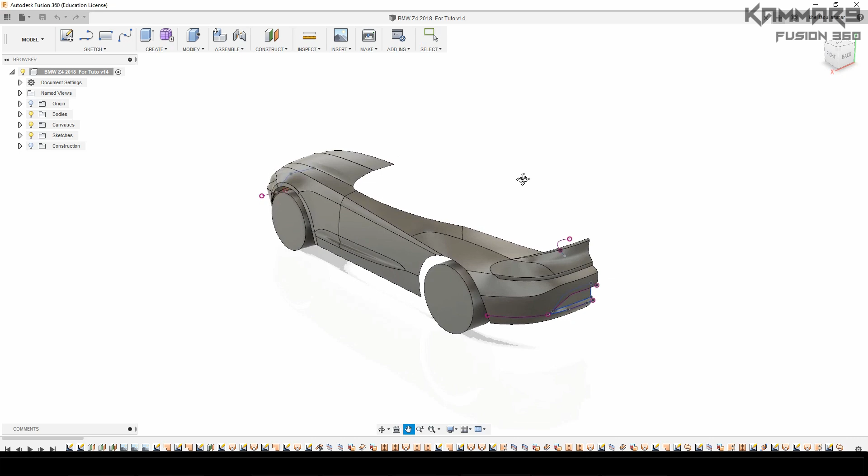Here we're working on the Z4, in the rear, in the back of this car. Thanks to all the people following this series on the BMW Z4. I'll try to make it easy to help you learn the surface mode, or patch mode, in Fusion 360.

As you can see here, I start with a nice curve, just make 2 points and work with the controllers to make it in the same place.

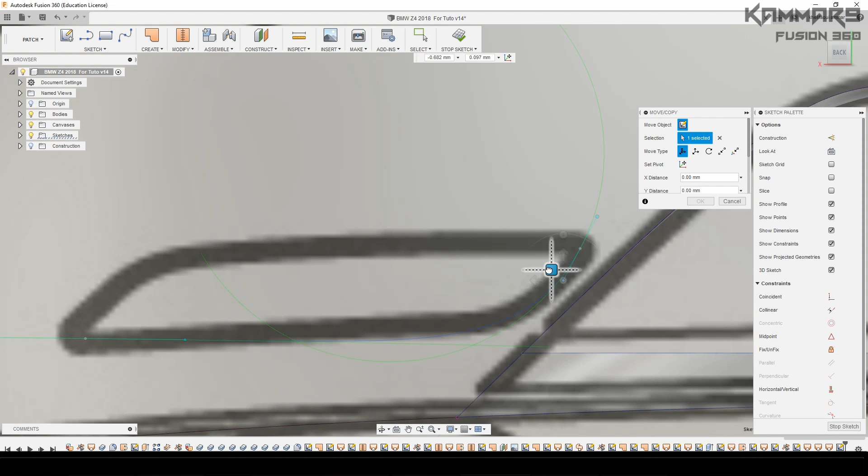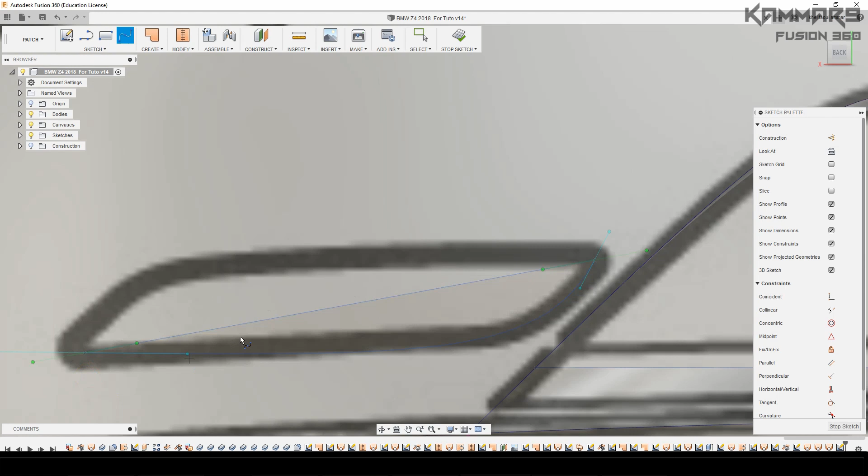As you can see here, Fusion lets you move all the controllers just with the mouse, not like in the previous version. Just use the mouse, don't use the M key. Just click and drag, and you have a nice result, as you can see here.

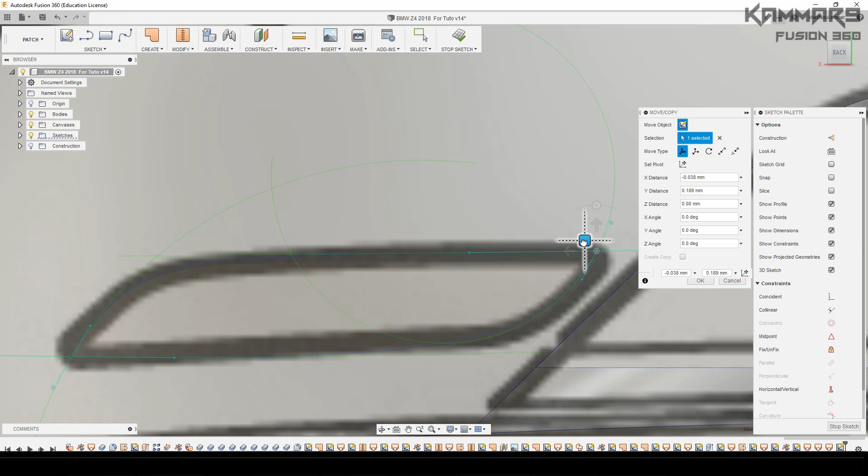You have to fit it to the blueprint. If you have a problem with the blueprint, refer to the first episode. I explained how to add the blueprint in Fusion 360.

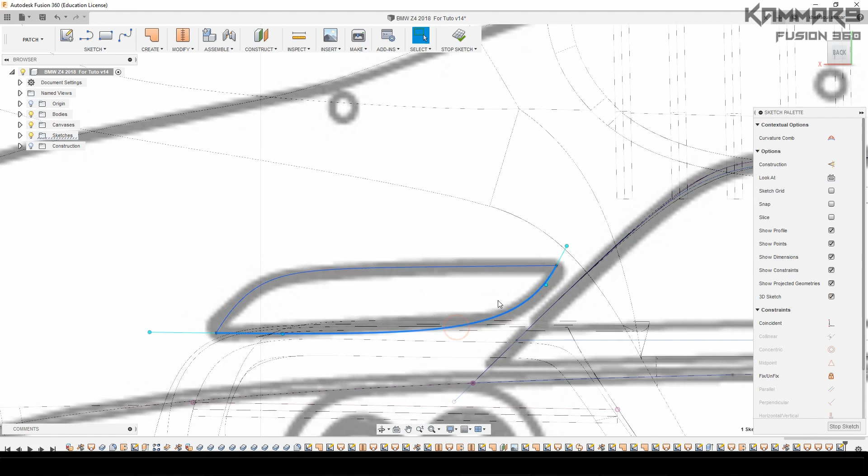As you can see here, you can use the shortcut key to change the view like this on the screen, to see what's going on in the interior of the car, and see the edges and hide edges.

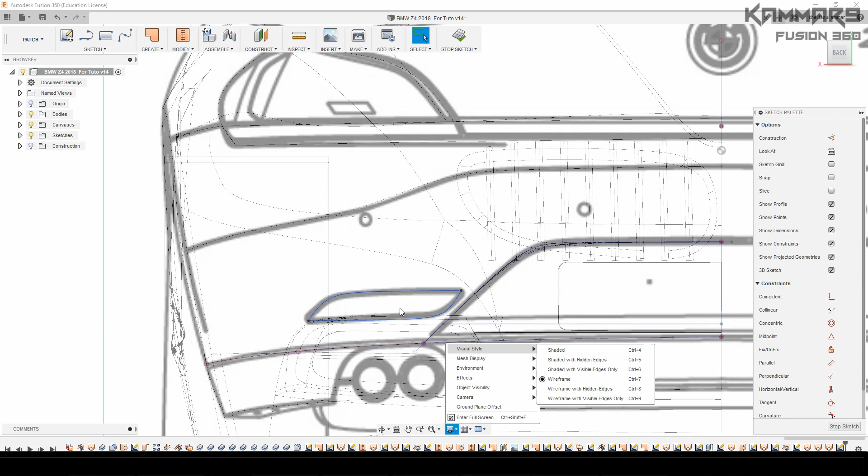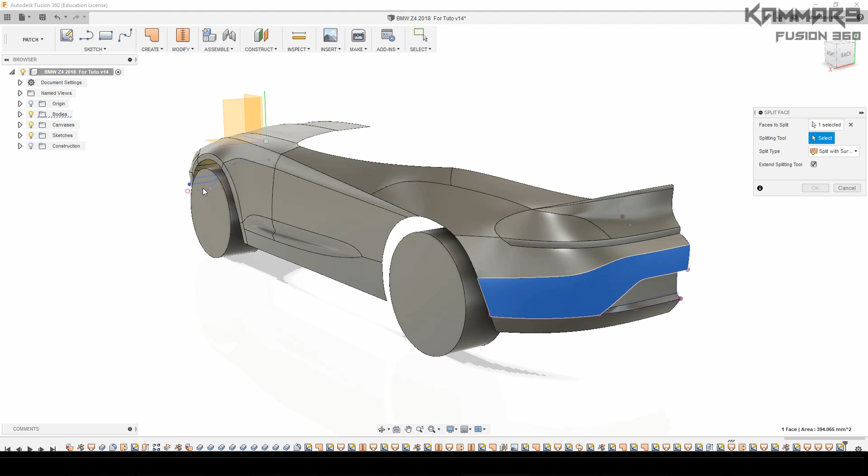As you can see here, you can use a shortcut to see this. And now, if all is alright, you can trim the surface using only the sketch we did.

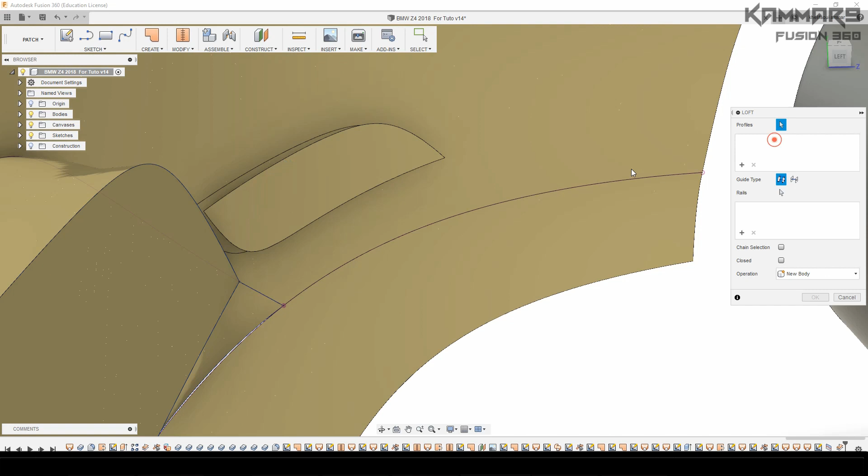Put here 0.5 and reverse the direction. You can rotate your car here and see what's going on in the interior. Just use the loft. The loft feature is nice here because it lets you make a bridge between two surfaces.

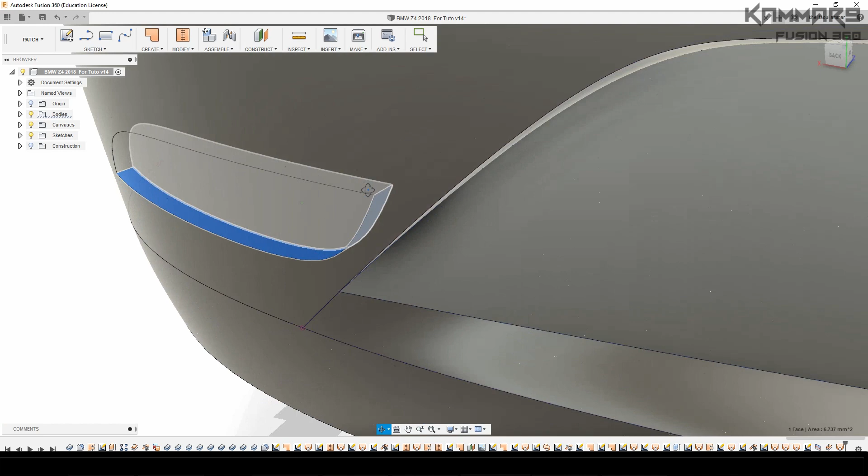As you can see here, with this you can make a nice result to use it in KeyShot, okay, when you add material.

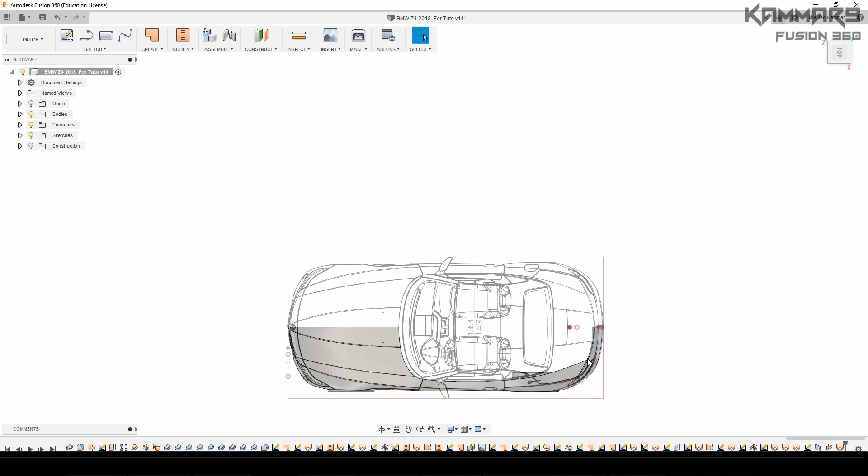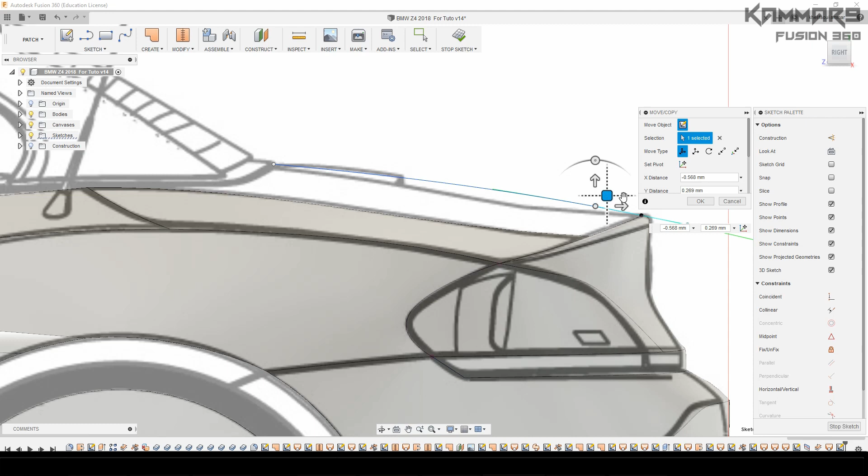Let's go on and make the top back of the car, or the cover. Let's use the right plane and start with the spline, just using the first point here, and see your blueprint. As you can see here, I will fit it to my blueprint. The goal here is to make the general surface, and we'll cut it after and add details.

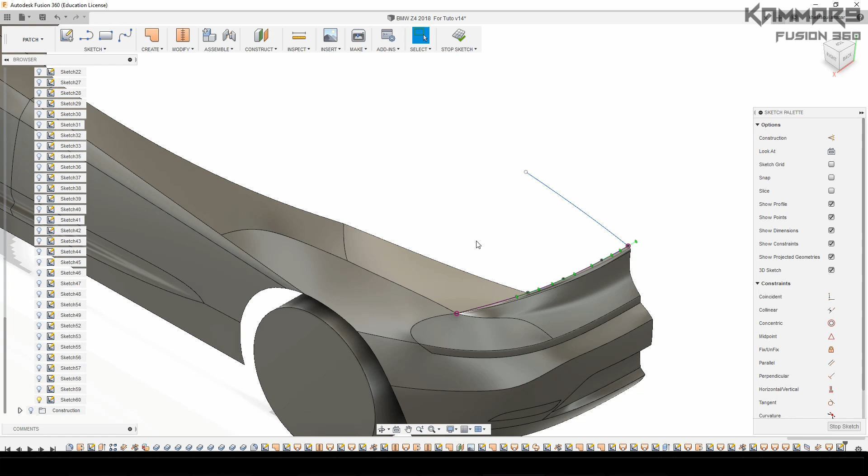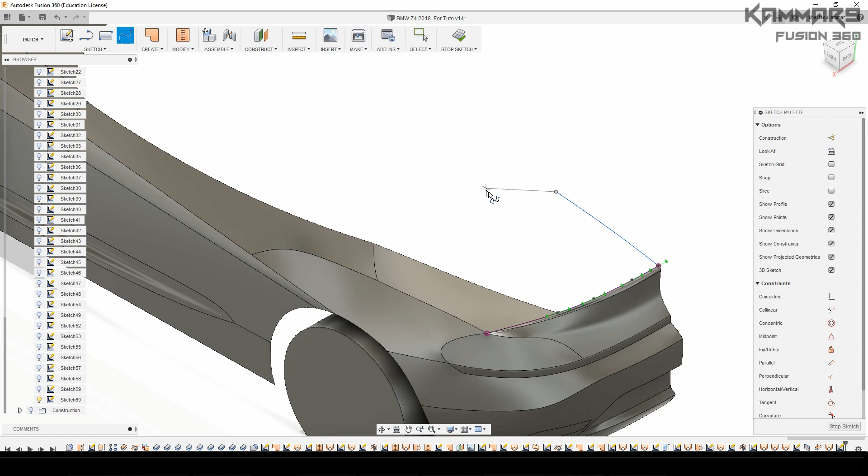Here you just have to hide all sketches you used in the previous surfaces, and add another. Make sure that to do this you've activated the 3D sketch in the sketch palette. That's the second spline, and for me I have to add another spline here. Just make sure when you touch your 3D sketch with the surfaces or the edge of the surface, you have to activate the 3D sketch palette.

As you can see here, I will click here, and I have to click on the edge of the surface to make it coincident. But the deal here is to make it in 3D. Just use the M key to move your controller or your point like this one.

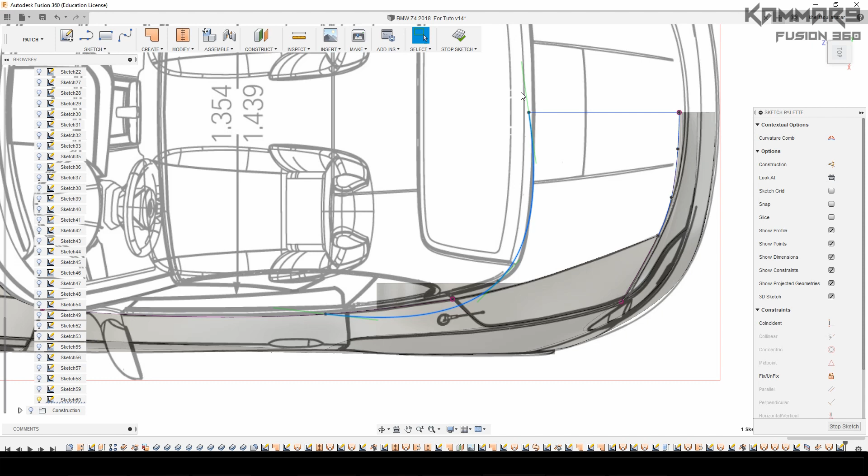As you can see here, I'm using the top view and the right view to make it fit the blueprint, because any error here - if you make an error here, it's complicated to make the other surfaces, because you have to fit all your splines to the blueprint.

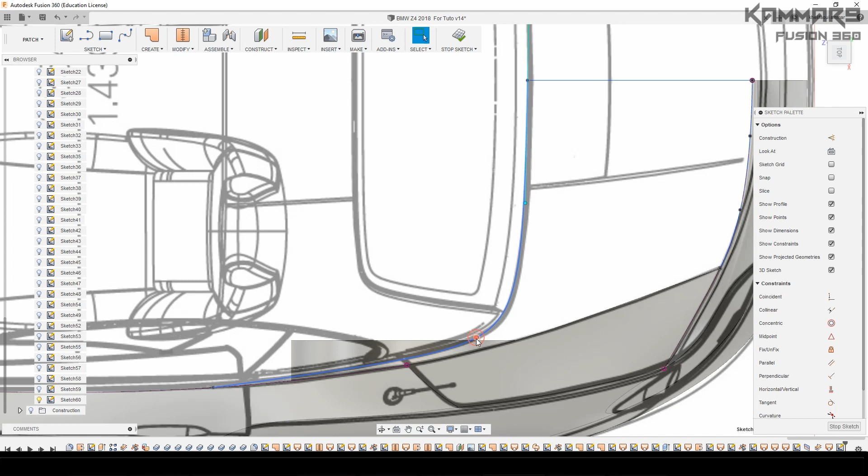At some point I actually accelerated the video, because you only need to see the result. I think you know how to manipulate the spline now from the first episode. We are here in the 18th episode. I think you can do many things in patch mode in Fusion 360.

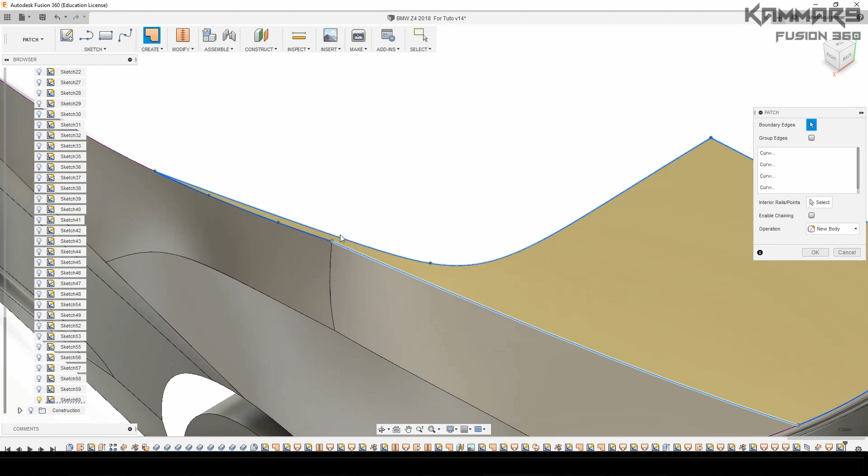Here you just have to choose the patch feature and select all the edges, and you have a nice result here.

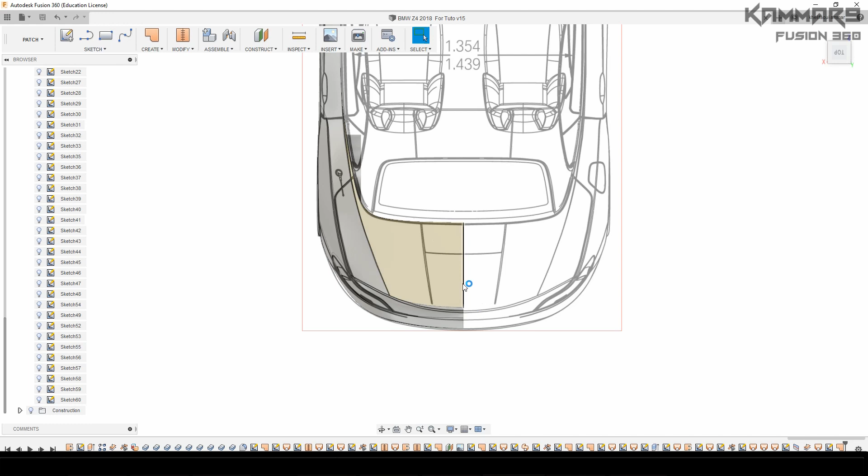Let's go ahead and now make a detail of the top back, or the cover, of this car. Let's choose the top plane - sorry for the motorcycle here - top plane, and choose the spline here, and let's make a detail here.

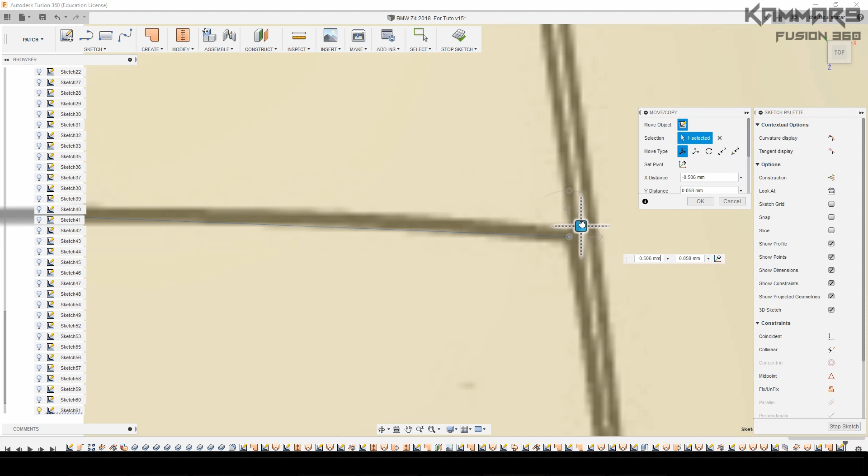All you have to do is make a spline here and move it like this, and choose controllers and move them to fit your blueprint. Choose another spline. If you want, just make it like this, and we will trim it using the trim tool.

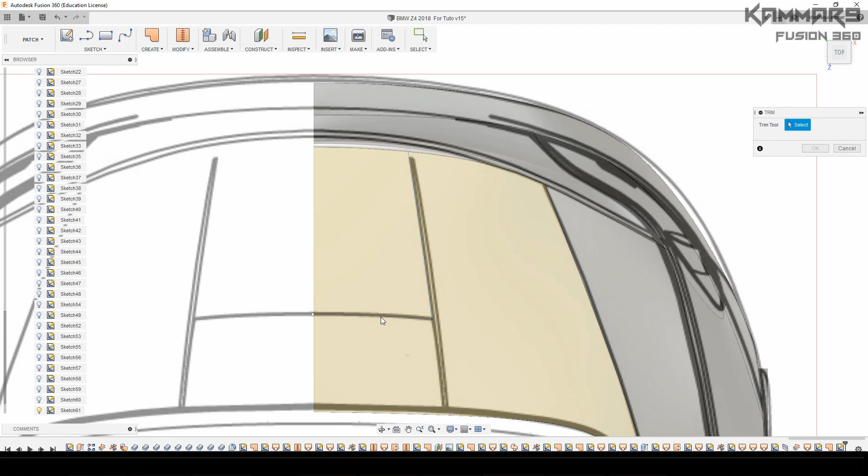Go to the trim tool, choose your sketch as the tool, and remove this surface.

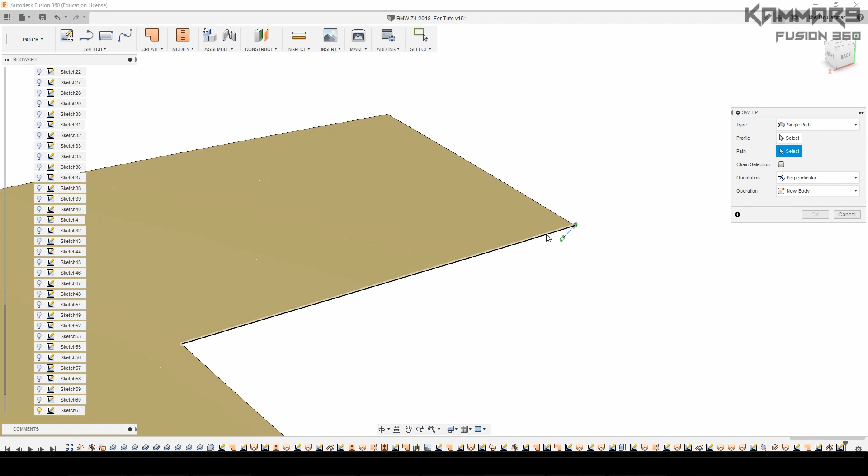Now let's create surfaces on this area. Let's start with the right plane and make it like that, and now choose the sweep feature, the path, and check the chain selection. Select this like a profile, and you have this kind of result.

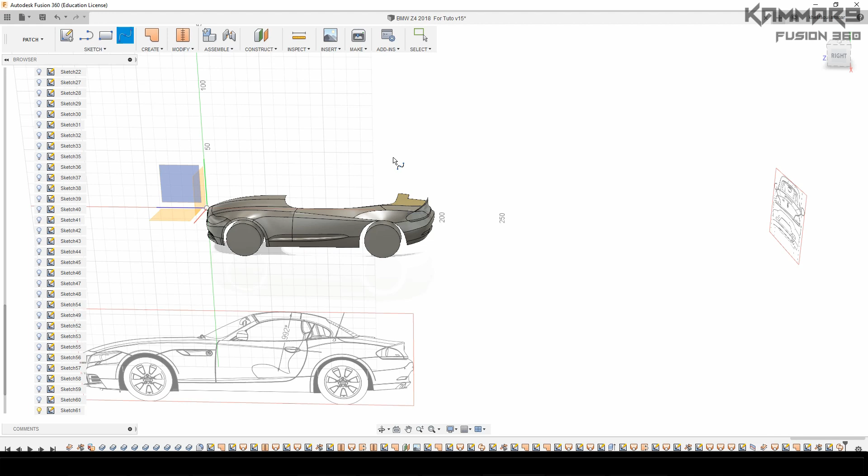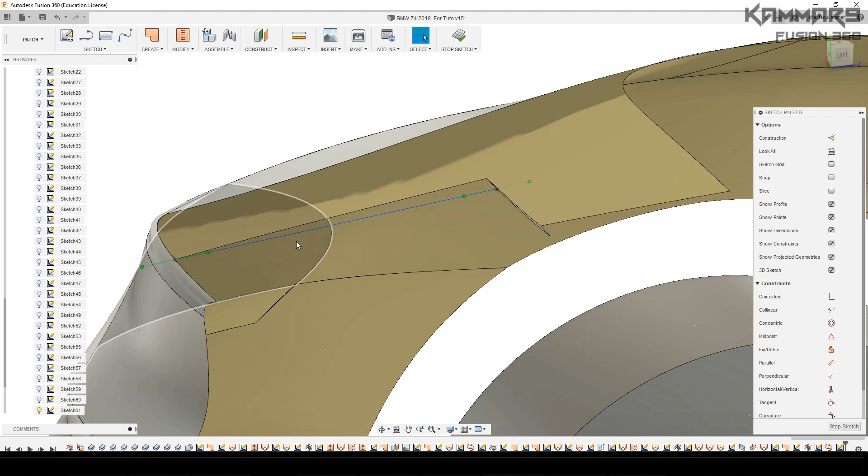Now choose the right plane - sorry - choose the right plane here, and start from this point to this intersection, and you only have to use the loft feature to make surface here.

Choose this as the rail, and the last thing to do is choose the right plane and make a spline or edge from this point here to this point. Okay, you have the nearest result here.

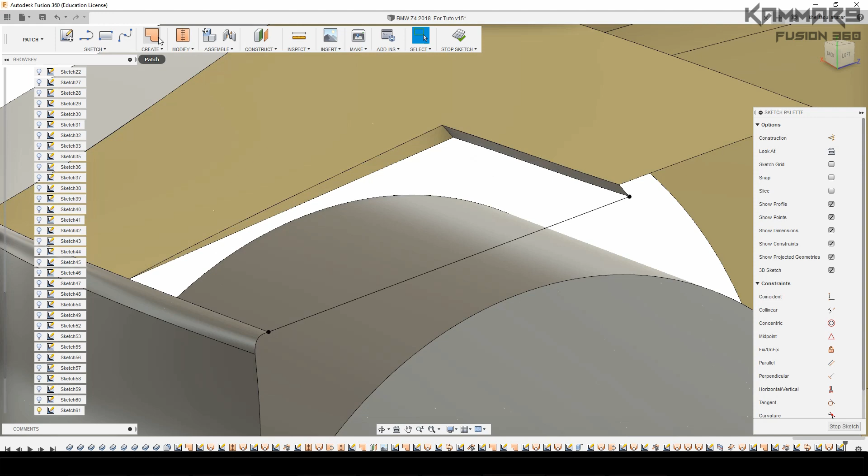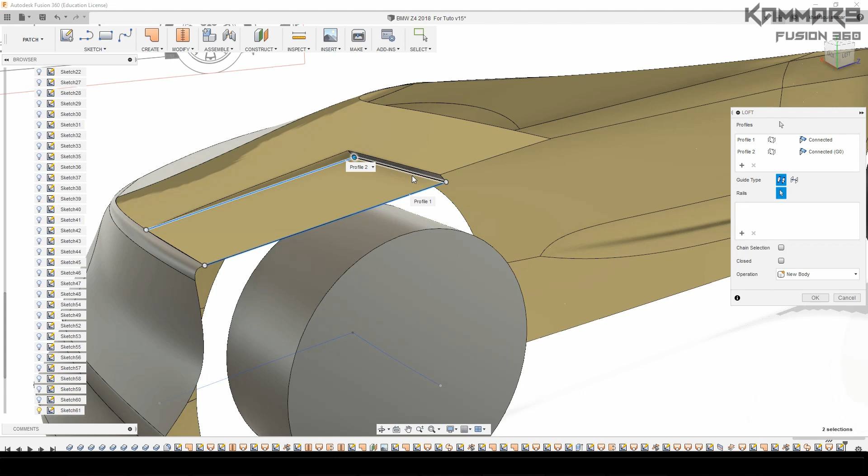I will use this as the rail. Let's use the loft feature, but make sure to remove the first profile - it's not good. I will repeat this to understand what's going on here. This is like the rail. Click OK, and you've done it.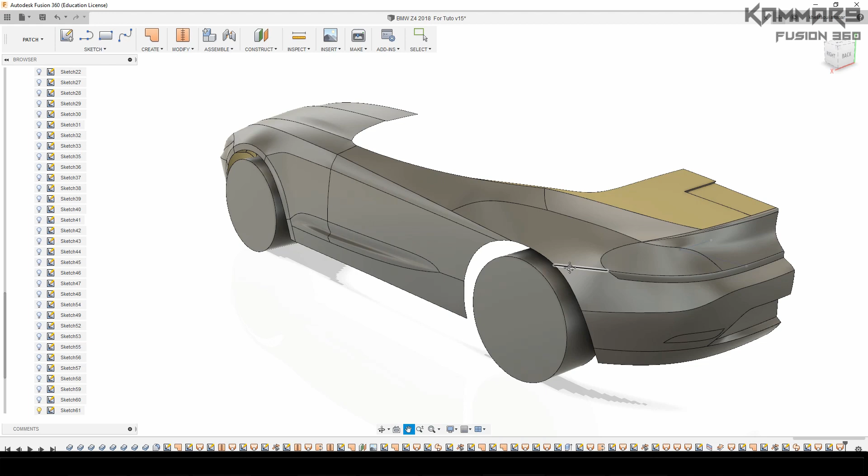Let's move on and make another surface. Let's work on the round of the wheel. Just make 3 points on this plane and adjust it with this controller.

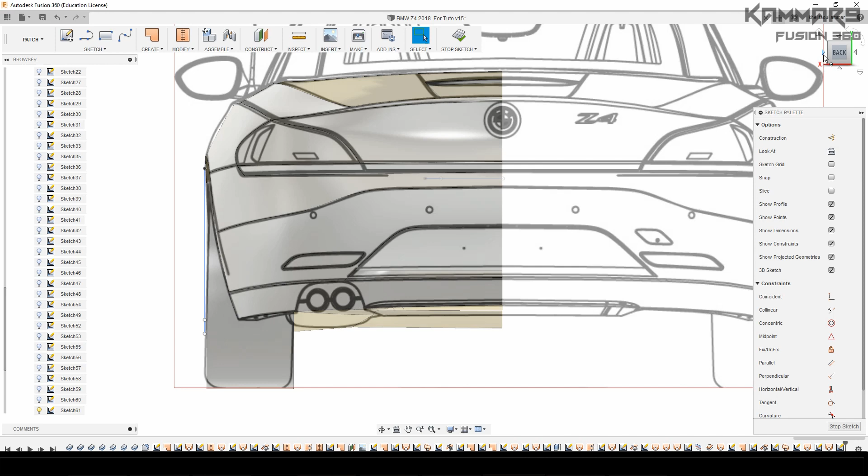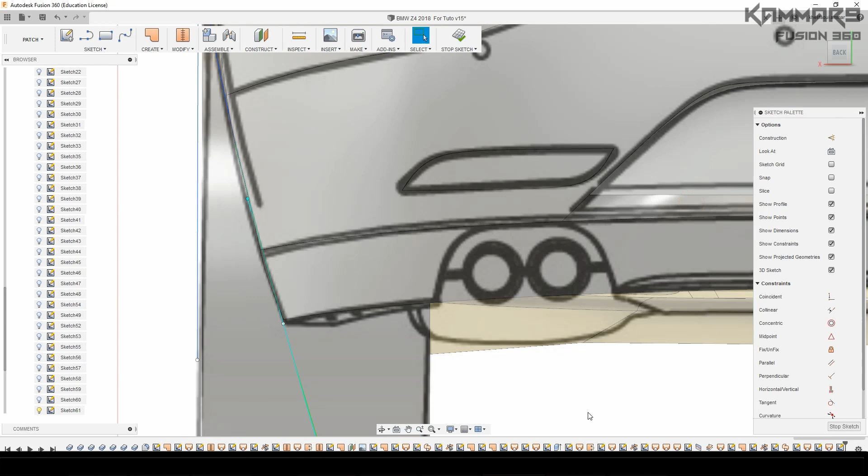Let's move the spline like this one. As you can see here, when you return your view, you have to make this point and this, as you can see here, in this edges. Okay, you have to fit it.

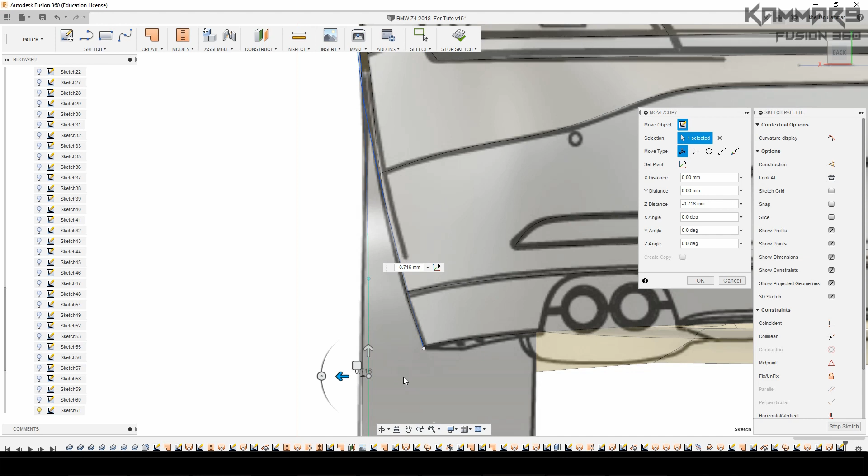As you can see here, the same thing. See from the top and move it like this one. The same thing here, just move it like this one a little bit. Okay, to make a curve spline.

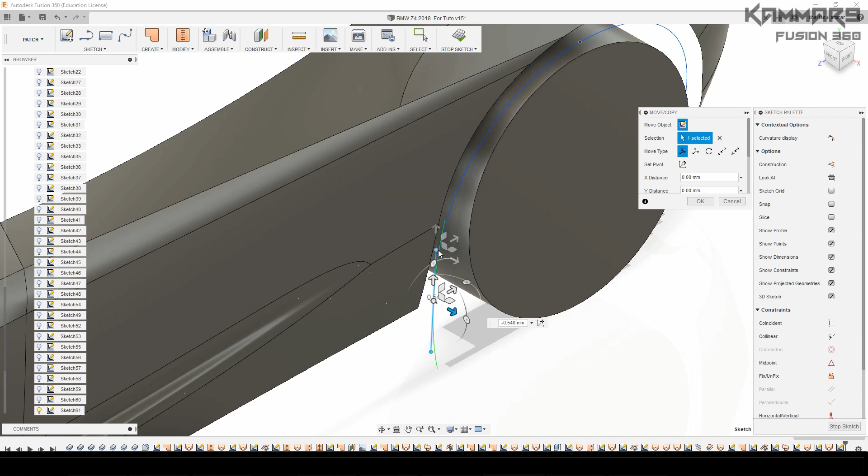Let's see this point. I think it's good here. Okay, I think it's alright. The only thing to do here is to add. I have to... not this.

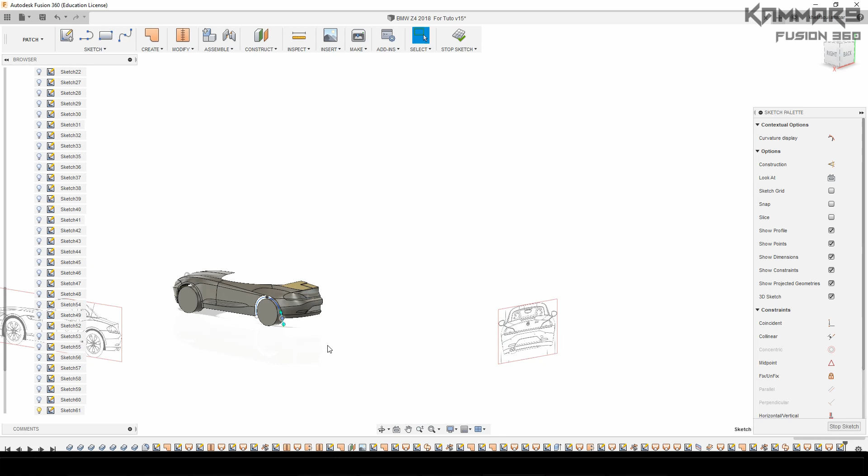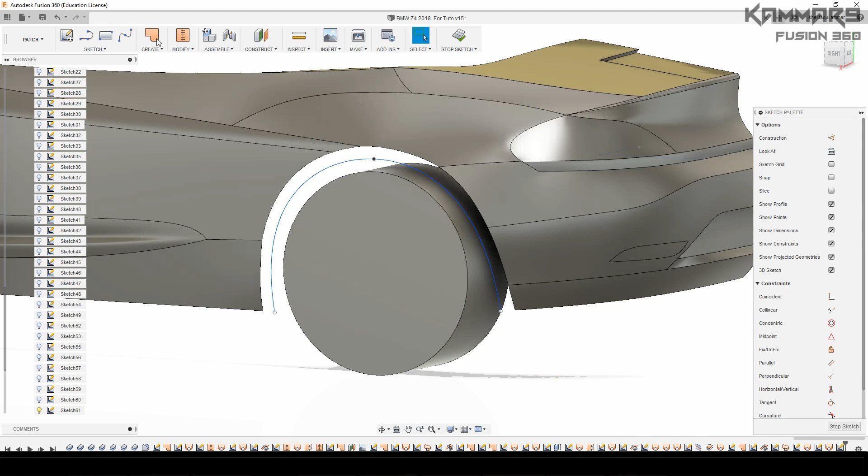Let's see this point. I think it's alright here. You have only just to add another spline. I have to add another spline in the surfaces, in the edge of the surfaces, to make only one, and make a loft to make a bridge between these splines. Okay, I will start from this point

and go ahead. For me, I prefer to select the middle of each surface, because when you select the point of the segment, I try to do that, but I don't get a nice result. So I make points on the edges or the curve edges.

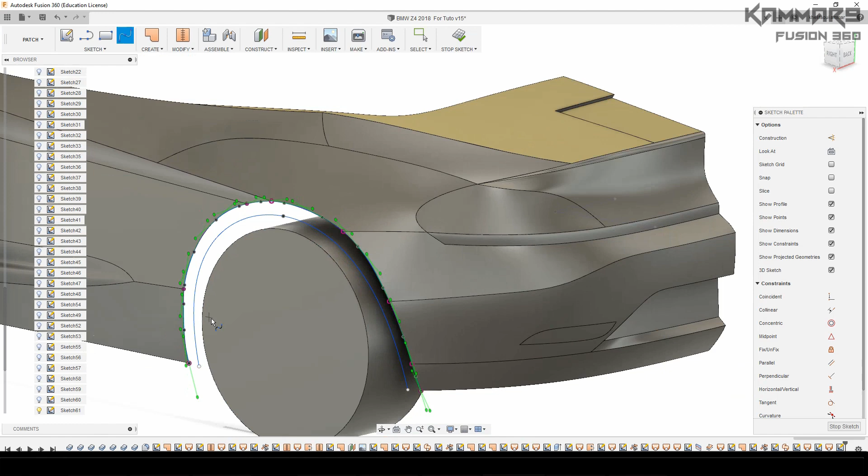As you can see here, you have a smooth curve here, and what you have to do is choose loft like feature and select these like a profile, and you have a nice result here.

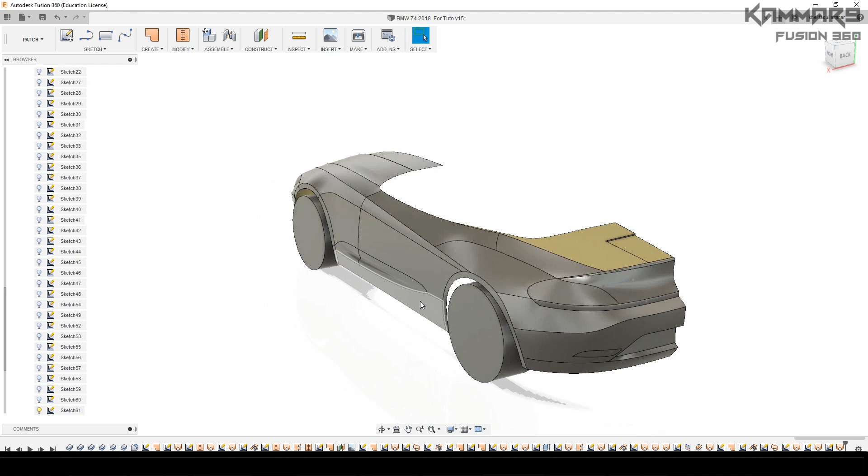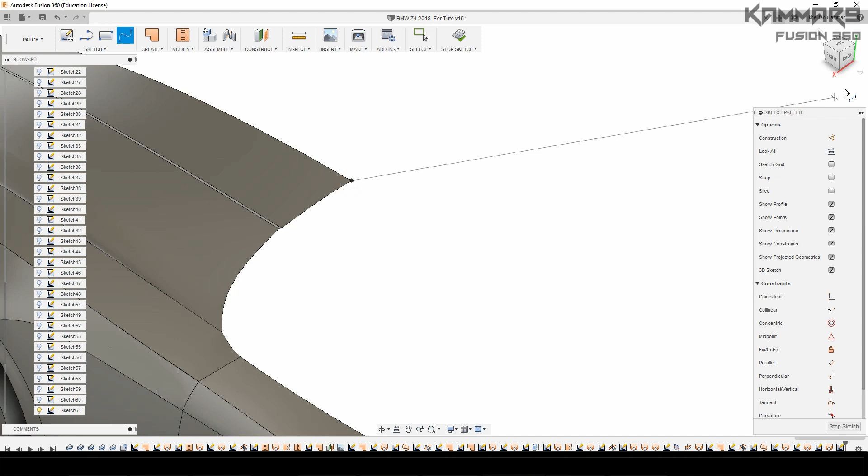Here I will make some detail of this zone, and just turn your model like this and start from this point and make a point just here. But it's not a problem, because

after, when we make other surfaces, we can modify this. That's the good thing of the patch mode. We can return like SolidWorks. You can return to the previous features and modify it. Okay, it's not a problem.

But when you use the modeling surfaces like in Blender, if you did an error, you have just to modify this. Okay.

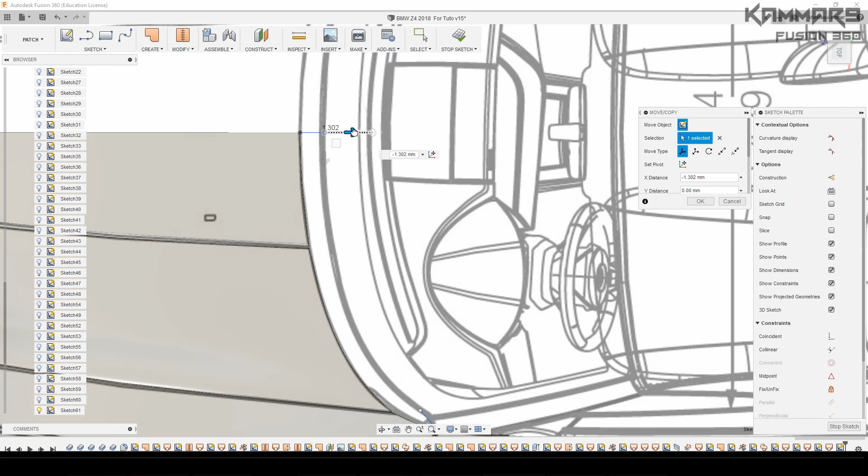Here I designed this segment just to move it like this one. As you can see here, I have to move this a little bit like this.

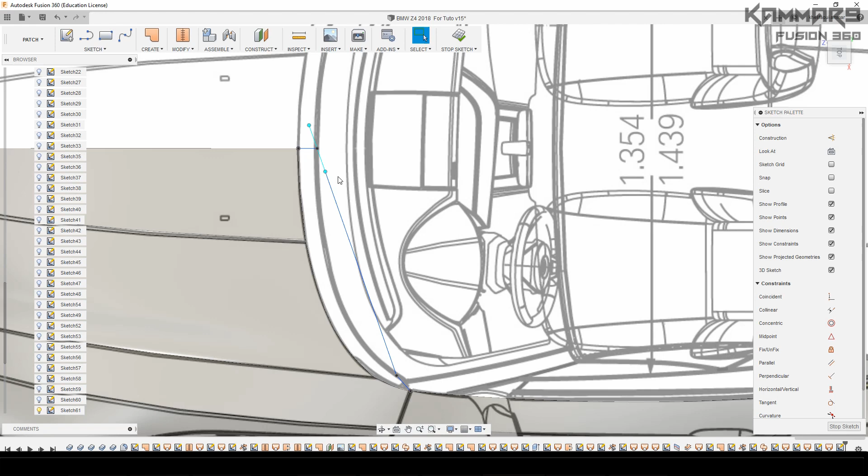And now let's go ahead and make, you have to be in the 3D mode or 3D view to use these planes. No, it's not good like this. You have to select only the point.

I don't know why there are two points in each. If they did different size of the point, we can select only the blue or the green points.

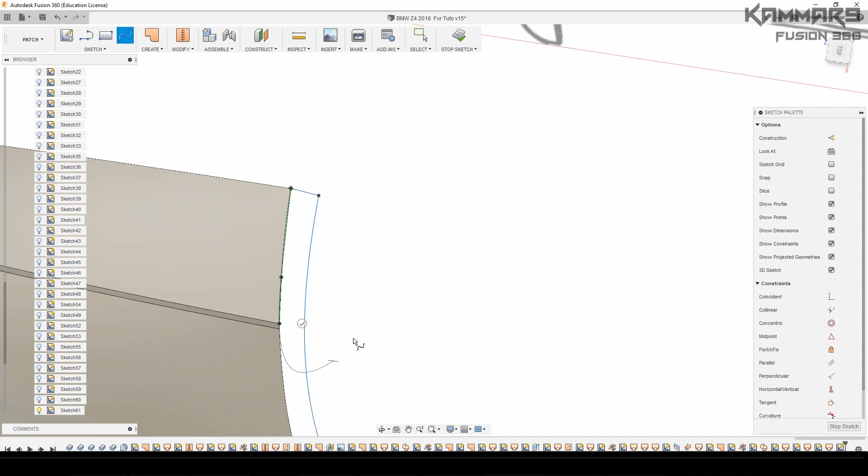As you can see here, you have to add a spline here, as you can see. But for me, you can just only select these. Okay.

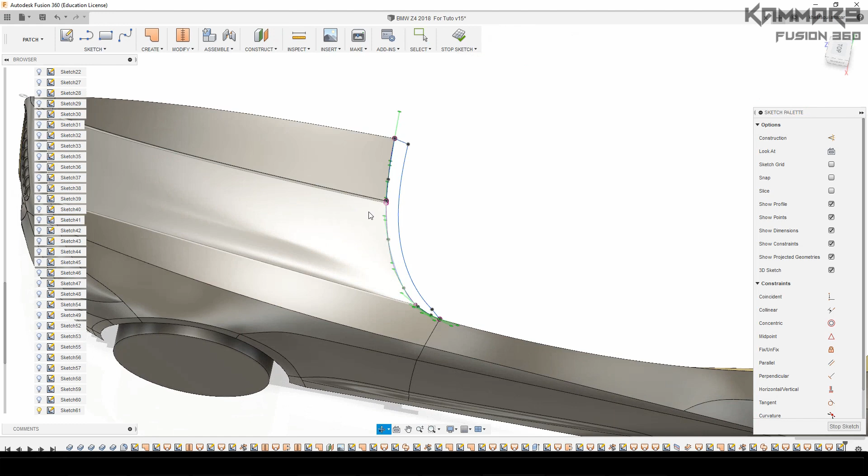As I say to you, I don't like to work with the points. Just select the middle of the curved edges. We have a nice result here. Only what we have to do is make a patch here, and we have a nice result.

Let's go ahead and make other surfaces.

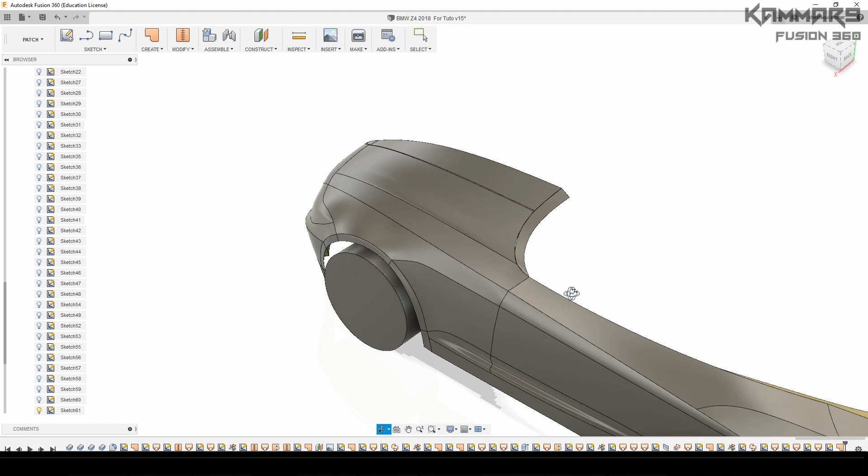Here we'll continue working on the detail of the car, because we got a nice result.

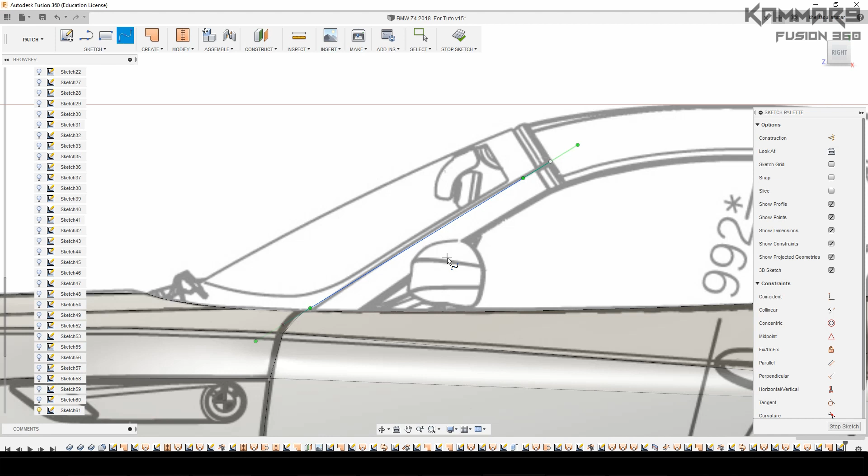And here, just follow me step by step to make this detail, because this detail is difficult. It's not like global working on the surface, but the detail mode, when you did an error, is complicated to make the nice surface after. Okay,

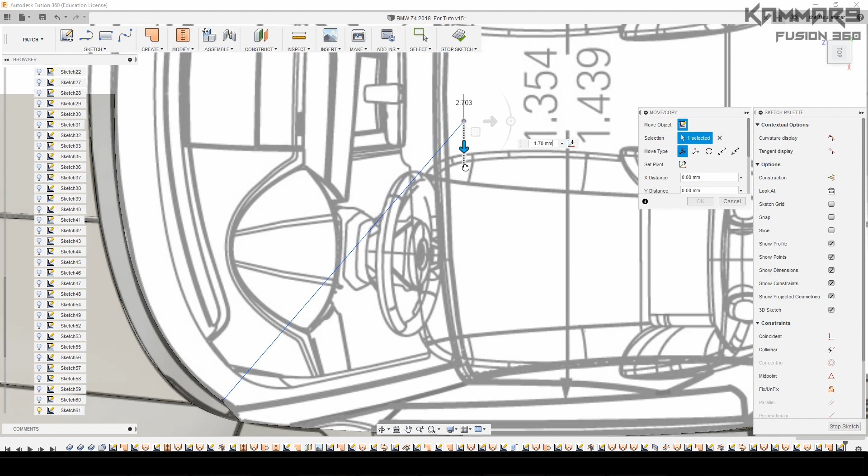because all detail is like in assembly. When you did an error in part, you will find an error in the other part assembled to the wrong one.

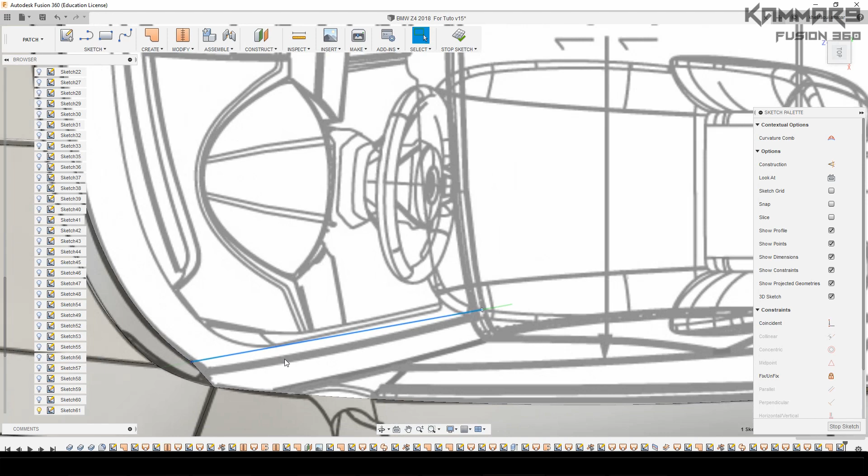As you can see here, I have to move or edit, like I say to you, I will edit the sketch, the last sketch here. This point is not to be here, but I have to move it to this point.

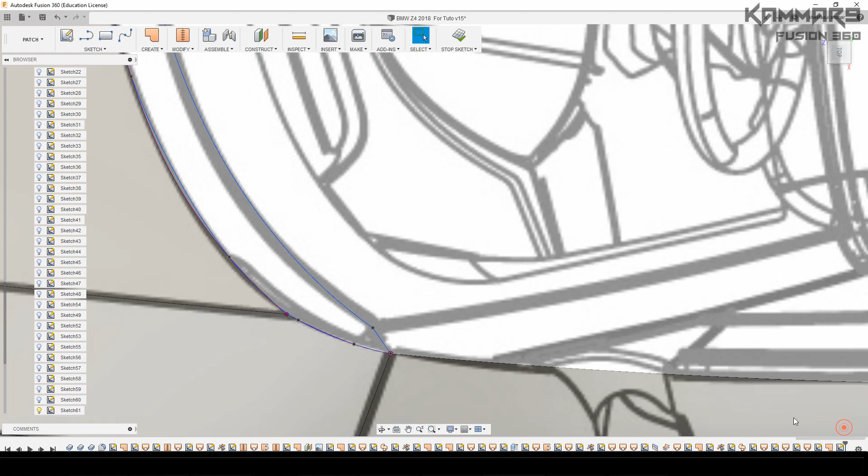Okay, that's the good thing in the patch mode. You can edit the last sketch, and no, it's not good like this, but I have a nice result. Let's stop the sketch and return to our sketch here. Just edit sketch. As you can see, the points are great here.

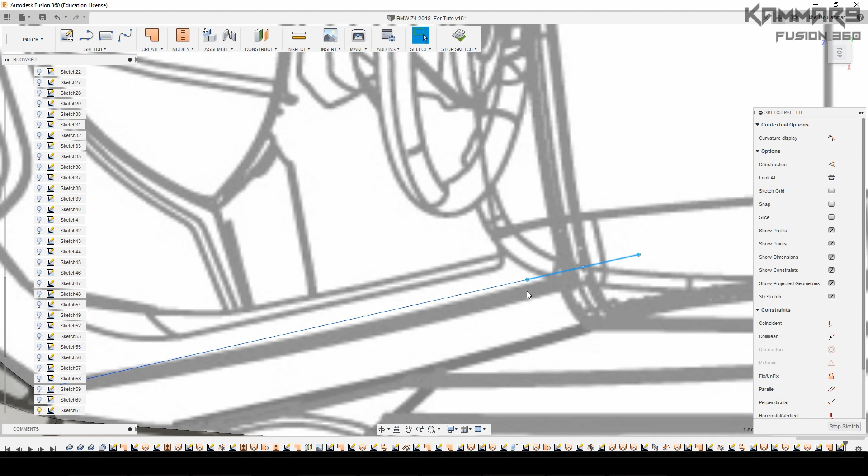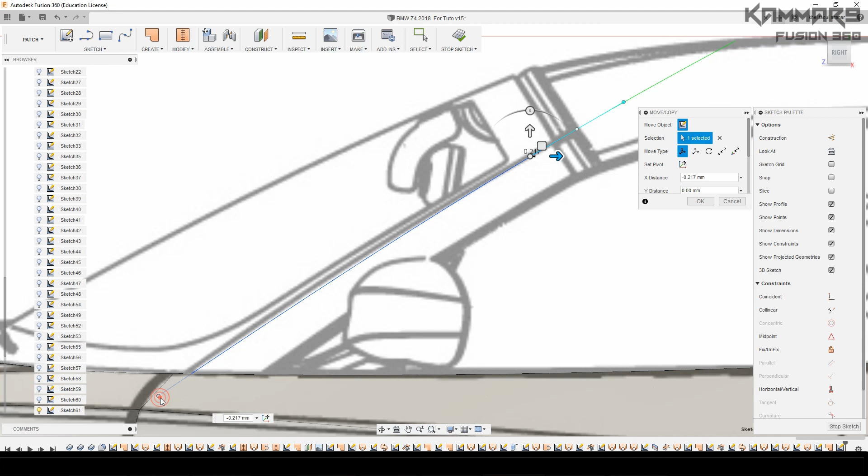Just activate tangent handles or controllers and move it like this. As you can see it from the right. Move it like this one a little bit. The same thing here to see a nice result.

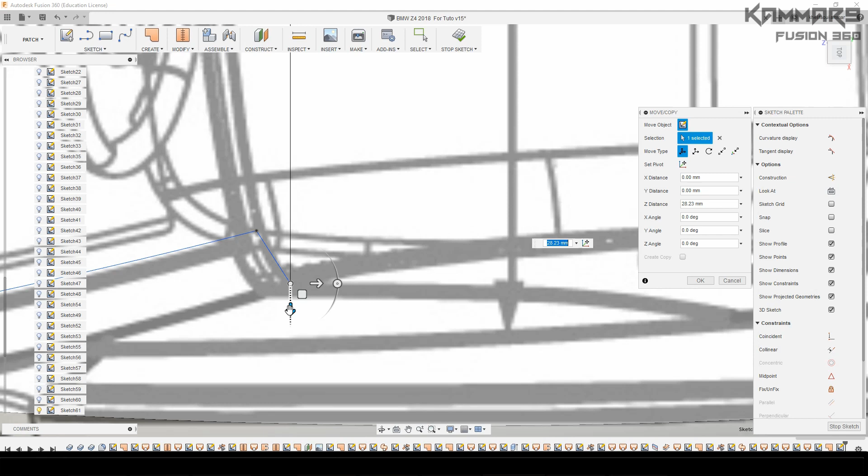As you can see here, you have to add another spline, but when you turn the view, you will find this point is here. Just move it with the M key. Okay, in the Z axis, don't move it in the X or the Y, because

you defined it in the right plane. As you can see here, here I want to be curved just a little bit to make the other surfaces tangent to it.

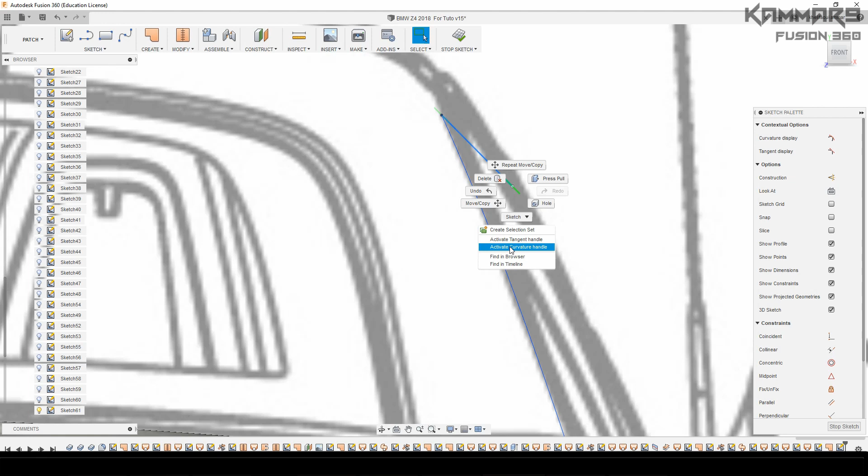Just activate the, not this one, I will activate the tangent handles and move it in the y-axis, just a little bit like this. Okay,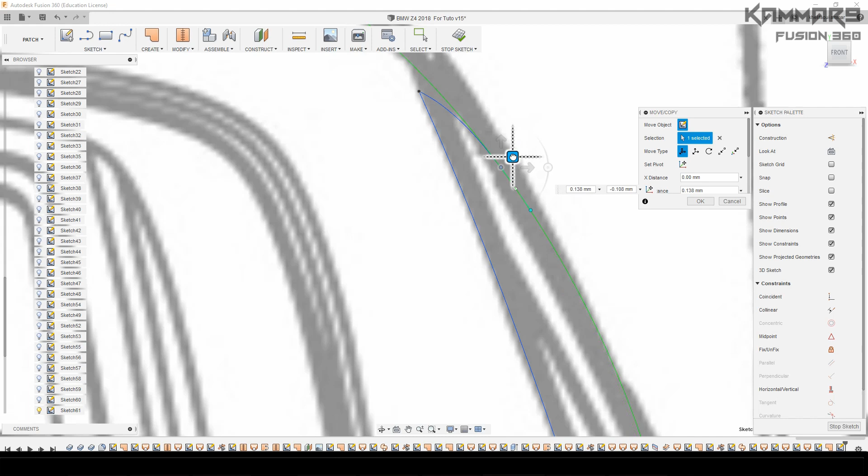not good. Just move this point again. Okay, this circle, it will be like this. Just move it a little bit. Okay.

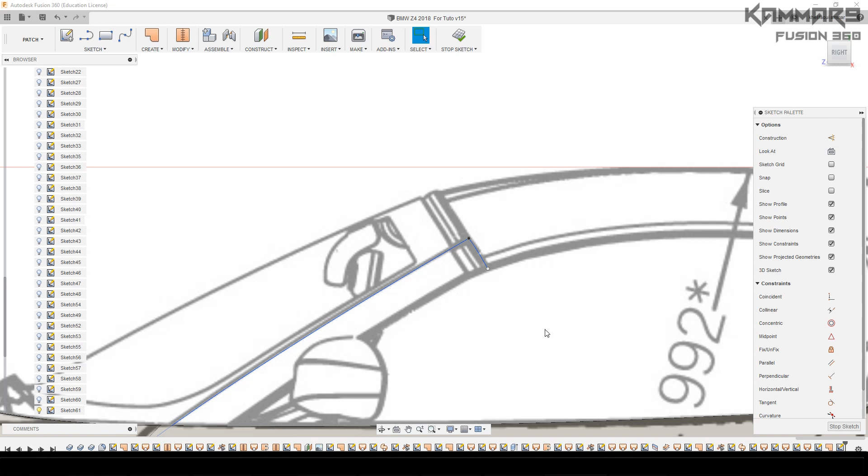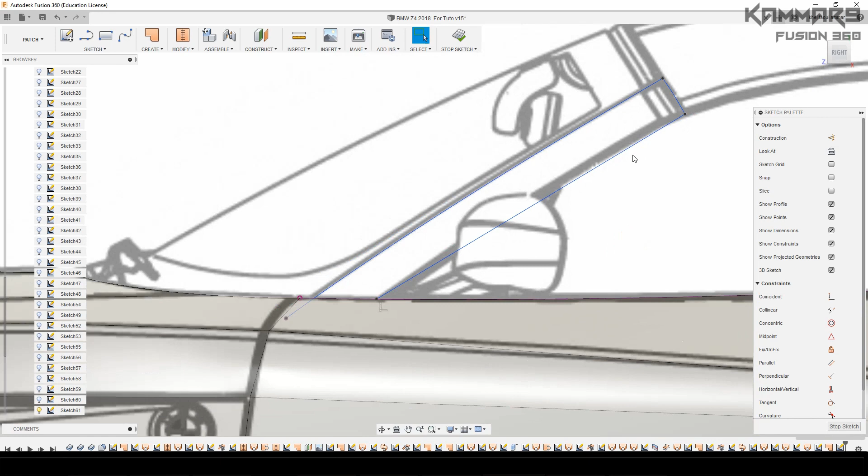I have to add another spline here. Just select the curved edge of the surface. You can move it like this one. And this one, you can curve it like this.

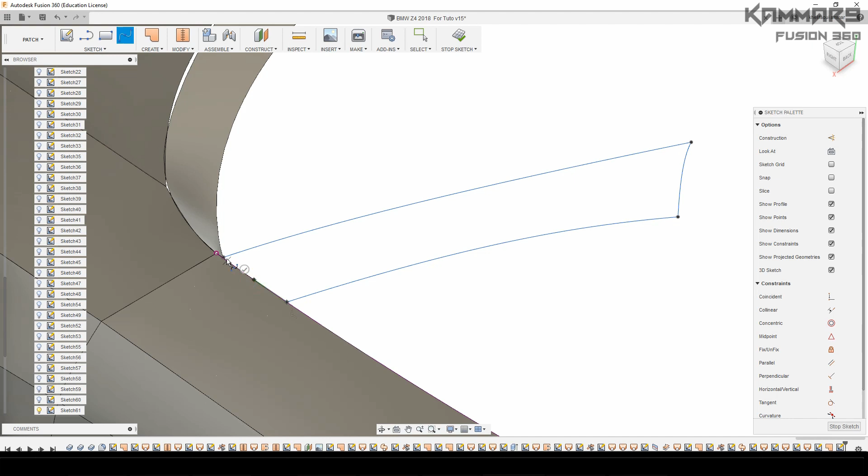Okay. And the last one is to add spline here. Let's see. Okay. All thing is alright here. Just see from the top to adjust your spline like this one. Okay.

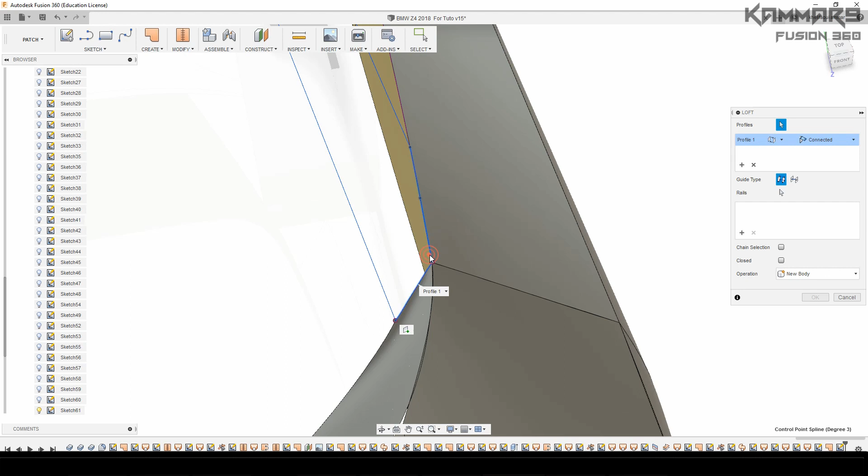Here you can use the loft feature. Go ahead and select this one and this one like the first profile. Second profile is this one, and make sure that you use rail like this one and this, and you have a nice result here. Please see you next tutorial and enjoy.